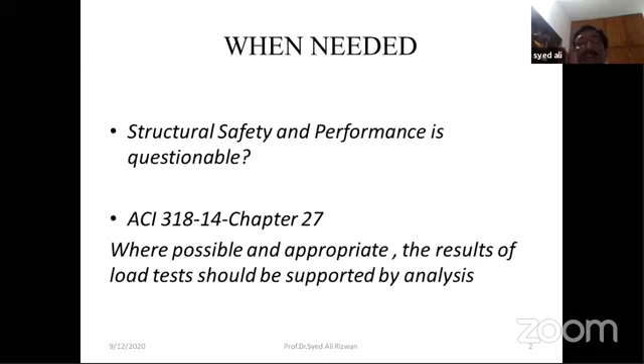But even then, I have observed that sometimes even very well designed structures run into problems. And especially with reference to Pakistan, we will see different, very strange reasons for the structural performance which is not up to the mark. So I hope the first slide is clear. And what is the role of ACI code? Here I want to elucidate the role of ACI code.

This is written on the first or second page of the ACI code, because the code is written by ACI Committee 318. I am a member of three other committees, 232, 234, and 237. So all committee documents are intended for use of individuals who are competent to evaluate the significance and limitation of its content and recommendations, and who will accept responsibility for the application of material it contains.

I mean, the ACI code or any other code or any other committee documents do not accept any responsibility which may arise due to the use of its contents. Individuals who use this publication in any way assume all the risk and accept total responsibility for the application and use of this information. So when you use the ACI code, you cannot, in fact, be free of the responsibility. And actually, the engineer in charge is the ultimate responsible, and he can violate the ACI code if he wants, but he is the sole responsible figure as far as the safety and the performance is concerned.

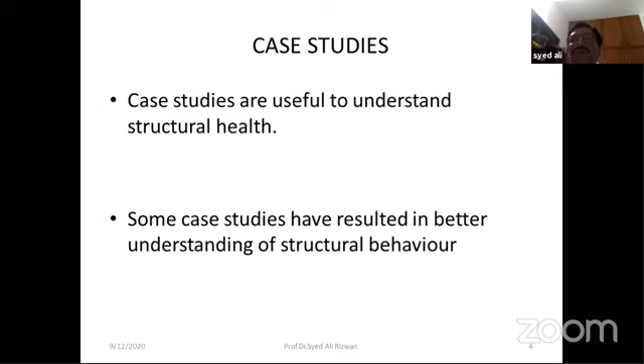Now, we usually learn from structural failures and poor performances. I give you one international case study. It is the collapse of a US Air Force warehouse in Ohio, and this happened in August 1955. The collapse occurred on 17th August 1955, and what the Americans did was to formulate a joint committee of ACI, the American Concrete Institute, and the American Society of Civil Engineers, and it was named Committee 548. And ultimately what they established was that the shear strength of concrete was wrongly taken at around 100 psi, which was dropped later to 50 psi.

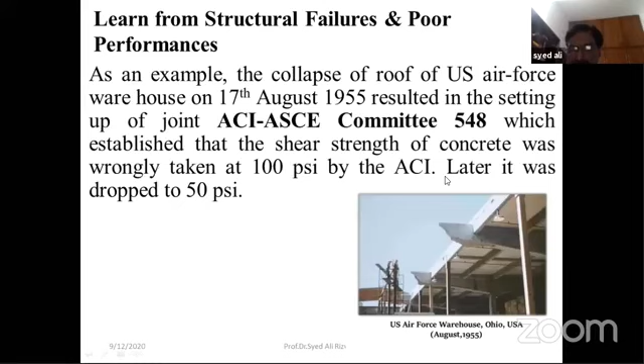So, if there is some structural failure, the engineers should be encouraged to go there, collect data, and share the data with their counterparts and friends, so that it could be published for the interest of the engineering community and the public at large, so that such kinds of failures do not happen. But we should not blanket such accidents. Some faults happen. It is human to make some mistakes. So the mistakes are studied or should be studied, and then the solution should be sought.

Now, what is the need for health assessment and repairs of structures? If a structure shows inadequate service performance in terms of cracking, shows huge sagging and spalling, or sometimes it vibrates, then it needs on-site or in-situ health assessment and possibly strengthening thereafter. Reasons for such a response can be many. For example, inadequate analysis or assumptions, or inadequate design for a particular structure at a particular location. Something goes wrong, improper execution.

And in Pakistan especially, maybe it's not possible in other countries, subletting the structure to a lower category contractor, which we call the runaway of the main contractor. Some poor structural performance has also been attributed to that, and I will show you some slides on that. Then structural damage due to fire can occur, and then the client or some responsible agency can approach individuals to investigate whether it is possible to use the structure anymore, or it needs demolition. The other reason can be inadequate materials and conceptual mistakes in old buildings.

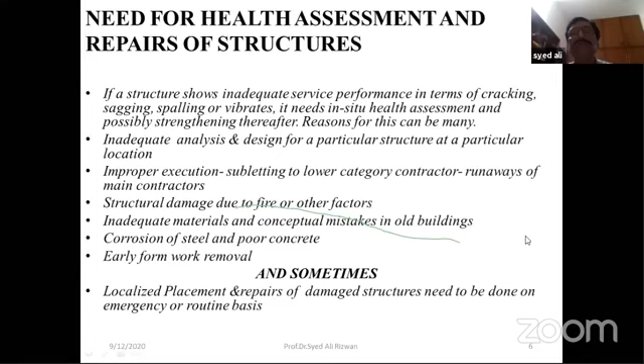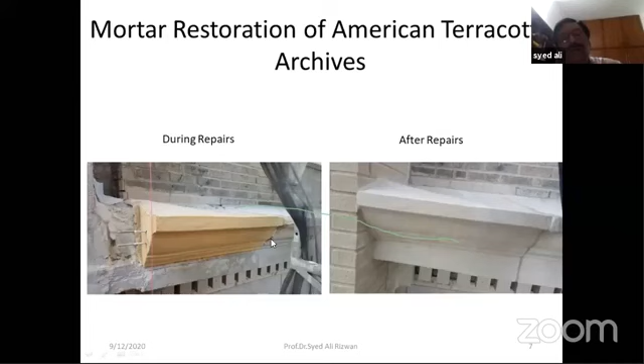Now in Pakistan, I have done different case histories. Number one, the basement columns of LDA Plaza located at Egerton Road, Lahore. When I graduated in 1976 and joined the department as a lecturer, I was a team member along with senior professors to assess the response of the basement columns.

Then in the second case history, I include the fire damage to Pace Shopping Center, Gulbarg, Lahore. UET Lahore was approached to perform the load testing and recommend whether it needs demolition or repairs and strengthening. Later on, engineer Rizwan Mirza and Associates did the restoration works. We performed the load tests and took out some samples from the members, which are needed for any analysis.

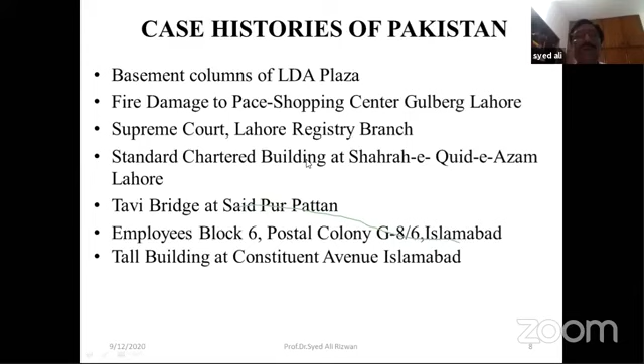So these case histories will be taken up. Now, the routine method of on-site or in-situ health assessment usually includes site inspection, and from site inspection you get reasonable information regarding the temperature in case of fire, or the magnitude of the cracking, sagging, or spalling. These have to be measured.

So all these are included in site inspection. The purpose is to make the path clear regarding the nature of the problem with the structure, and we locate the signs of distress. Signs of distress in a structure can be cracking, spalling, and things like that, or melting of certain attachments. Then we can finalize the methodology - what tests we are going to do regarding the on-site health assessment.

And then we can carry out some tests, which may include non-destructive testing, or sometimes destructive testing, or some samples can be taken out from the structure which can later be tested in the lab. Based on their results, we can interpret and conclude regarding rehabilitation strategies - which strategy can be applied. If we think rehabilitation is not the real answer, we may recommend that the structure be demolished in the overall public interest. So these are usually the steps to gather data and to fix your orientation on what to do with this structure.

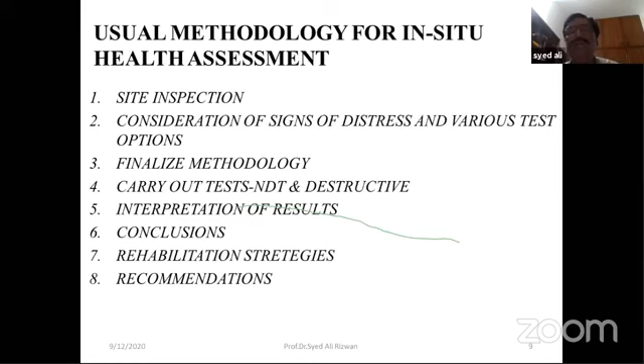I move on to the next slide. Actually, in 1976, we did this assessment of strength of basement column of LDA Plaza.

We took several photographs, but those are not available with us anymore now, because it has been about 40 years plus. A colleague of mine went there maybe 5-6 years before and sketched this building. The question at that time was whether the columns of this building had obtained the required strength, which was, I think, around 6,000 PSI.

6,000 PSI concrete at that time was quite a high strength concrete. Even now, ACI code says that if f'c is more than 6,000 PSI, it should be classified as high strength concrete.

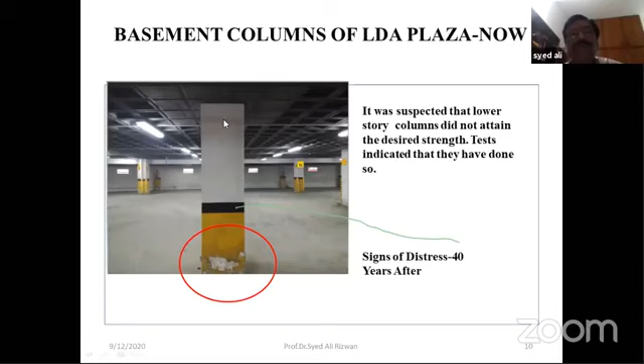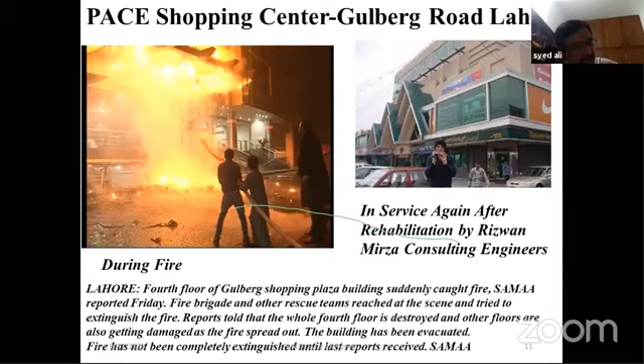So we assured them that we will do whatever is right, the right will be set right. Although the civil engineer of the owner carried out the assessment, he was my student, and I told him that visibly the floors were quite sagging. The concrete was divided into panels, and the crack widths were more than the permissible limit. If you measure the central deflection of different slab panels, it was more than allowed. So I said that as a civil engineer, you can interpret this to be a failed structure in serviceability.

Why do you want to get the load testing done? He said, sir, we want to get the load testing done. So I said, okay, if you are interested, we can do the load testing. So we performed the load testing. Time was a constraint. We selected the different panels to be loaded considering the influence line diagram requirements, the areas which can be loaded for maximum deflections. But to our utter surprise, and this is a case of interpretation also...

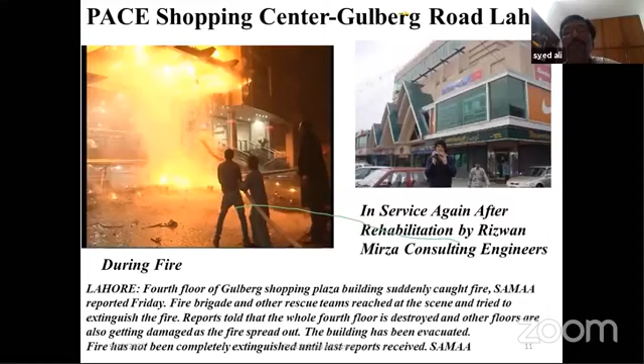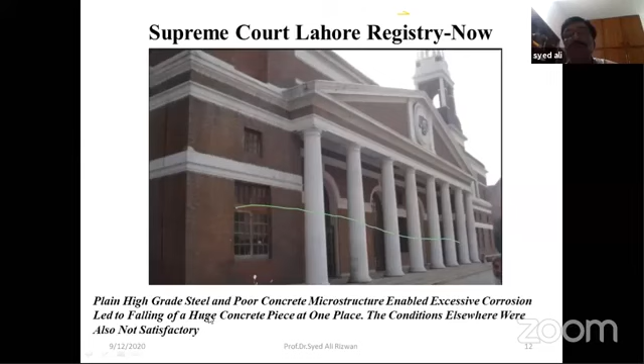The client came to UET Lahore and told us a very, very strange problem. The building had 4 floors. I said, what is the problem? He told us that the second floor of the building vibrates when a Volvo bus comes by. I said, okay, very strange. Why are the other floors not vibrating? The second floor is not very flexible. I think the most flexible floor would be the topmost floor.

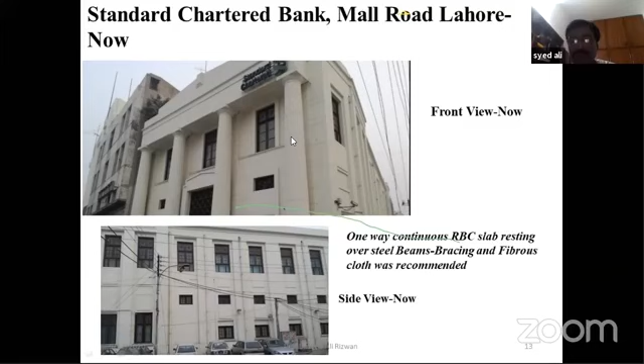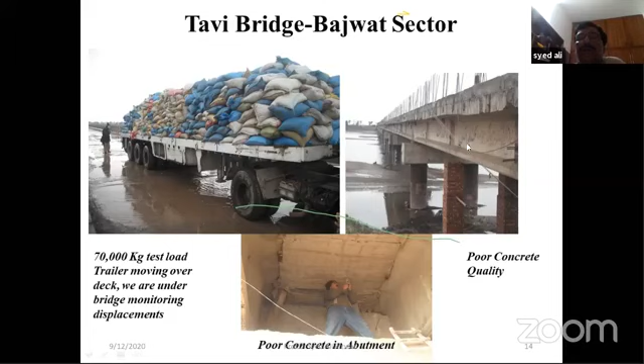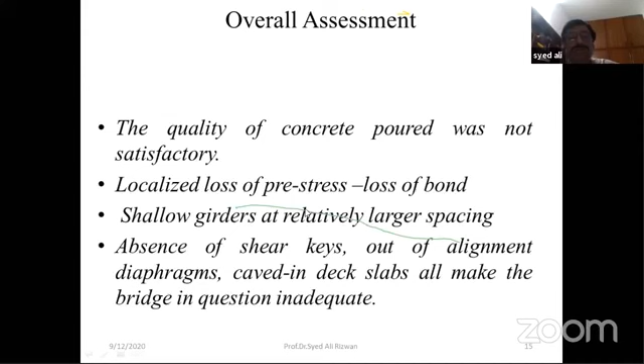We gave these recommendations. Both sides of the deck slabs must be immediately treated, because after treatment, we expected that this response will improve slightly. Routine smooth wearing surface may be provided to reduce impact. The bridge can, however, be put to use by permitting one-way vehicular traffic only after doing the needful required work. All surfaces of the bridge components must be immediately sealed with polymers under competent supervision. All exposed steel reinforcement must be protected immediately.

The expansion joints may be treated to reduce impact of wheel loads. Approach slabs should be reconstructed to provide smooth vehicular entry onto the bridge. The cracks that appeared in the girder and the diaphragm should be filled with suitable epoxies to prevent further corrosion. External strengthening options like external pre-stressing may be considered for rehabilitating the girders. Use of fiber cloth was also recommended. The designer must consider the provision of shear keys for better stability. So this was our report.

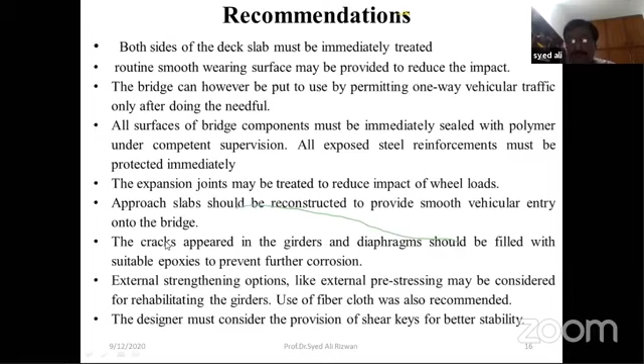We remained there for about 7 days and then made calculations and material testing results. So the report was submitted after about 2 months. I was there at NUST, and we had all the techniques or all the apparatus. We could measure the corrosion by using digital half cells or electrical resistivity meters. So there was no problem like that. So this was the unique problem arising out of the subletting of the project.

Design observations. We made some design observations also. The pre-stressing protocols and routine concrete quality assurance test records could not be provided in addition to design calculations and modeling data file. The following observations were made after seeing the drawings. Design web thickness of 7 inches looks less. Depth of pre-stressed girder looks shallow, and lateral girder spacing looks relatively large. No shear keys were provided. It seems that composite action between girder and the deck slab was not taken into design, and horizontal shears between deck and girder have not been accounted for.

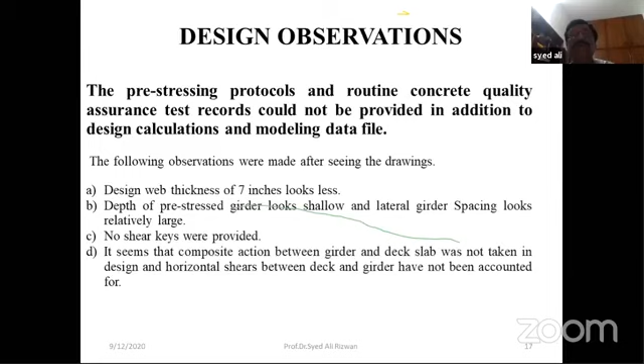Then we took another project. It also came to NUST. Pakistan Post approached us, and they were constructing a colony, a 6-story colony for the employees of Post Department in Sector G8 of Islamabad. When investigated, it was again a case of poor workmanship resulting out of project subletting to a lower category contractor. So our job was to see the adequacy of structural design, perform NDT, and make recommendations after base was ready.

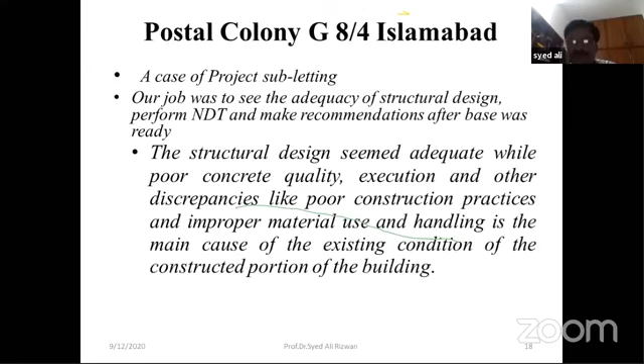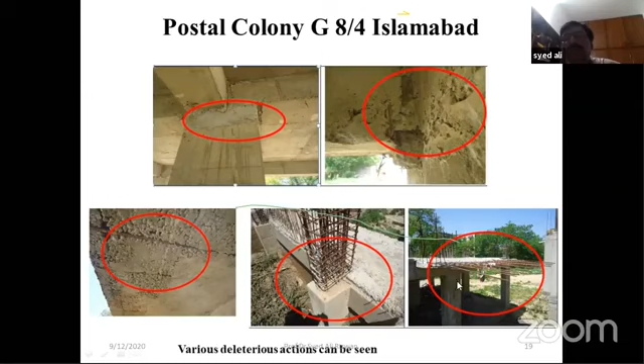You can see the column reinforcement cages, and we can measure the corrosion on that. We did this also. And then in some of the portion, you can see the reinforcement of the slab, and the contractor ran away, leaving the job. So it becomes difficult to repair. So we took some 4 by 8 inches cores.

Please remember that 4 by 8 cores give higher strength than 6 by 12 cores. Although they are allowed by ACI and ASTM, for 4 by 8 inches cores, you have to test at least 3 cores or 3 cylinders at one time. And for 6 by 12, you have to test at least 2 at one time.

So in the foundation, you can see the average strength of concrete, 2,653, 1,300 PSI. If you divide this by a factor of 1.2, then the minimum structural concrete should have a strength of 2,500 PSI, according to ACI code reference number this, at 28 days.

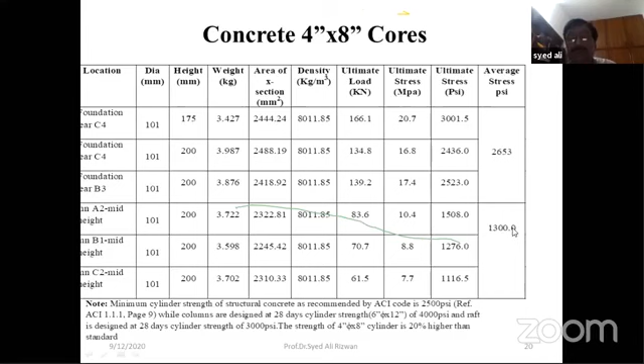So it was really a poor quality concrete and huge honeycombing and corrosion. So now the 6 inches f'c will be even less if you divide this by 1.2. Again, this will become a non-structural concrete.

Then we measured possible corrosion rates by electrical resistivity tests. Electrical resistivity in kilo ohms centimeter, the readings are this, and the corresponding degrees of corrosion rates somewhere are high, very high, high, very high, insignificant, very high. So a combined class of corrosion resulting out of lower concrete grade.

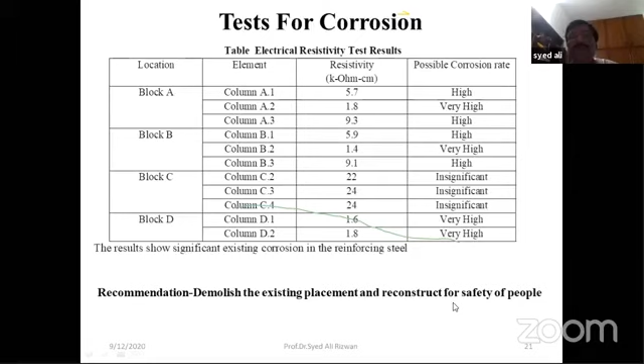So the recommendation was to demolish the existing placement and reconstruct in the larger interest and safety of the people. So the project was demolished.

Then another case of a high-rise structure in Islamabad. You can see these beams were quite huge. They were projecting beyond the slab by 9 inches. And if we consider 9 inches slab thickness, the overall beam depth will be 18 inches, and this lateral dimension was around 5 feet. This girder column to column spacing was around 35 feet in both the directions.

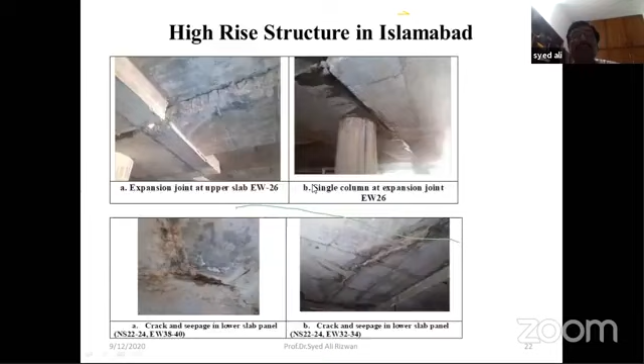And you can see the poor quality of concrete and sometimes the bearing, inadequate expansion joint. And then you can see combined cracking and seepage in the lower panel. Crack and seepage you can see over here. Then what they had done after that, they put huge localized loads on the site.

And again, this was a case of a runaway contractor. The contractor was a Chinese contractor, but I think in the international projects, usually some guarantee money has to be deposited. So I think they never made any profit, they were in loss and they ran away, but left behind a project which was difficult to reconstruct.

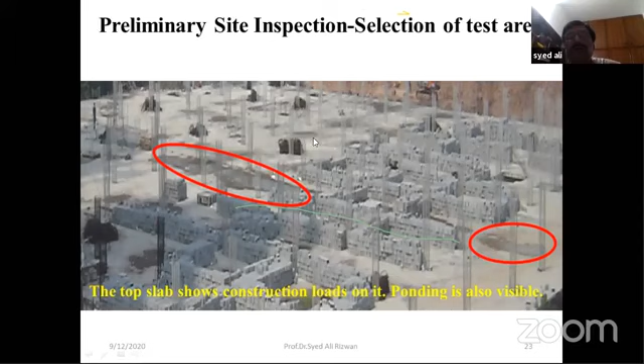The top slab shows construction loads on it. Ponding is also visible. It rained a night before and ponding of water was seen also at various locations.

Assessment for high-rise building. The term recovery should be based on the total deflection because the code seems to assume only a slightly deflected position as datum in the interpretation of recovery. In other words, the test does not explicitly mention its application and the interpretation of data pertaining to a significantly cracked and deflected panel before the load test. These same were my comments in case of Pace Shopping Center.

In addition to the recovery requirement, ACI Code Commentary, Article R20.5 acceptance criteria states that a general acceptance criterion for the behavior of structure under test load is that it does not show evidence of failure. Evidence of failure includes cracking, spalling, or deflection of such magnitude and extent that the observed result is obviously excessive and incompatible with the safety requirements of the structure.

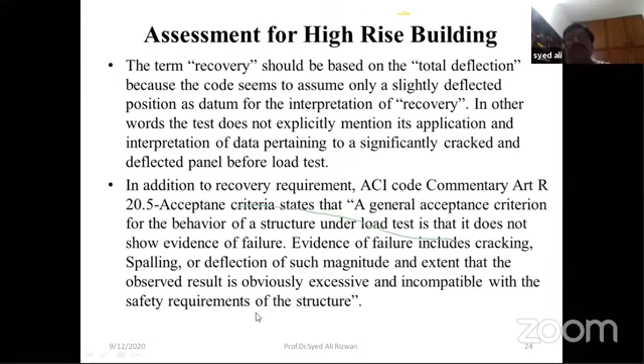So after examining the building code requirements for structural concrete, ACI 318-14, chapter 27, and these articles, the following is stated. The existing notion conceived by field or practicing engineers that even damaged structures showing excessive deflections, excessive cracking of concrete, and spalling, if they show desired recovery, are serviceable, is wrong. Actually, before the test, it has failed in serviceability. Structures failed in serviceability should not be subjected to load tests.